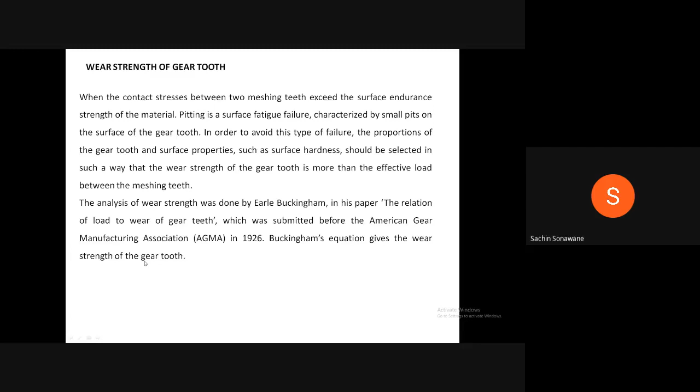Buckingham's equation is based on Hertz's theory of contact stresses. In case of Hertz's theory of contact stresses, when two cylinders are pressed together as shown in figure A, the contact stress is given by sigma c equals 2p divided by pi bl, equation A, and b equals 2p into bracket 1 minus mu square into bracket 1 upon E1 plus 1 upon E2, divided by pi L into bracket 1 upon D1 plus 1 upon D2, bracket raised to 1 by 2, equation B.

What has Buckingham considered? Buckingham has considered two gears as two cylinders of diameter D1 and D2, and when the two gears are in contact with each other, the force P is acting on both cylinders so that these two gears or two cylinders will remain in contact with each other.

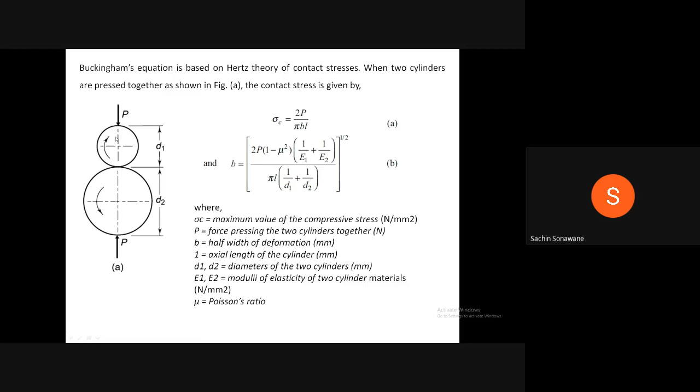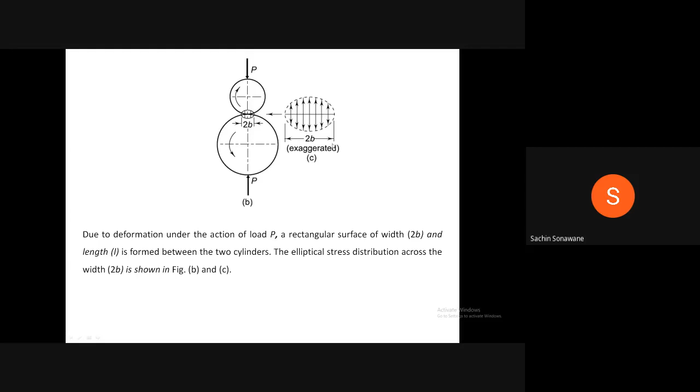When the two forces P and P are acting on the cylinders at the contact point, deformation will be there, and that deformation will be of rectangular shape, and there exist stresses also, and that stress distribution is nothing but of elliptical nature, and width of the rectangular surface is 2b and its length is L.

Now substituting equation B in equation A and squaring both sides, we get sigma c square equals 1 divided by pi into bracket 1 minus mu square into P divided by L into 1 upon R1 dash plus 1 upon R2 dash, divided by 1 upon E1 plus 1 upon E2, where R1 dash and R2 dash are radii of the two cylinders.

Substituting mu equals 0.3, we get sigma c square equals 0.35 P divided by L into bracket 1 upon R1 dash plus 1 upon R2 dash, divided by 1 upon E1 plus 1 upon E2, equation D.

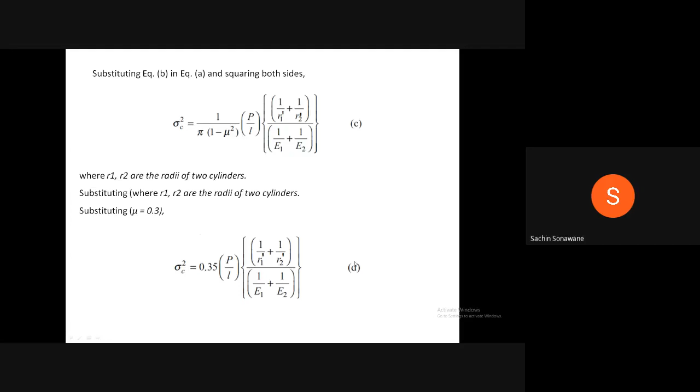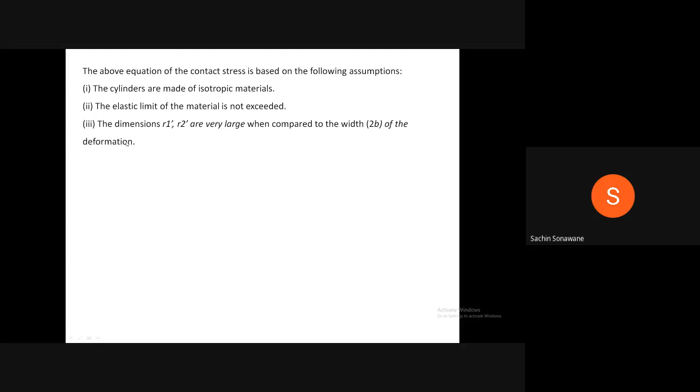The above equation of the contact stress is based on the following assumptions. First, the cylinders are made of isotropic materials. Second, the elastic limit of the material is not exceeded. Third, the dimensions R1 dash and R2 dash are very large when compared to the width 2b of the deformation. These are nothing but the radii R1 dash and R2 dash.

The figure shows the contact between two meshing teeth at the pitch point. The radii R1 dash and R2 dash in equation D are to be replaced by the radius of curvature at the pitch point.

We have considered this right angle triangle, and then we have evaluated R1 dash and R2 dash considering angle sine alpha. Sine alpha equals R2 dash divided by dg by 2. Therefore, R2 dash equals dg sine alpha divided by 2. Similarly, in case of pinion, sine alpha equals R1 dash divided by dp by 2. Therefore, R1 dash equals dp sine alpha divided by 2. These are the two equations we are getting.

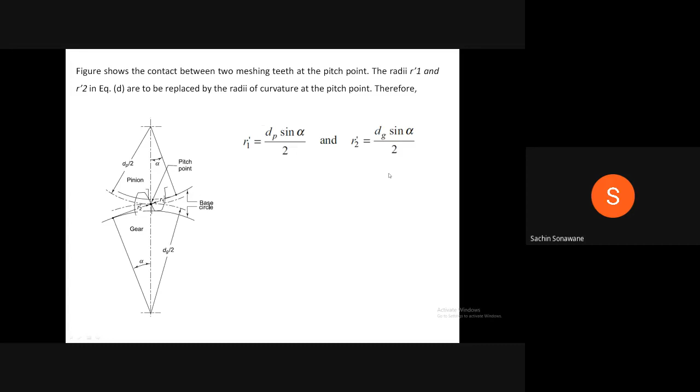Now, why have we taken radius of curvature at the pitch point? There are two reasons. First, wear on the gear tooth generally occurs at or near the pitch line. When only one pair of teeth carries the entire load, the contact occurs at the pitch point.

When the contact takes place at the top or at the bottom of the tooth profile, usually two pairs of meshing teeth share the load, and the dynamic load is imposed on the gear tooth near the pitch line area. Therefore, it is more reasonable to select the radii of curvature at the pitch point.

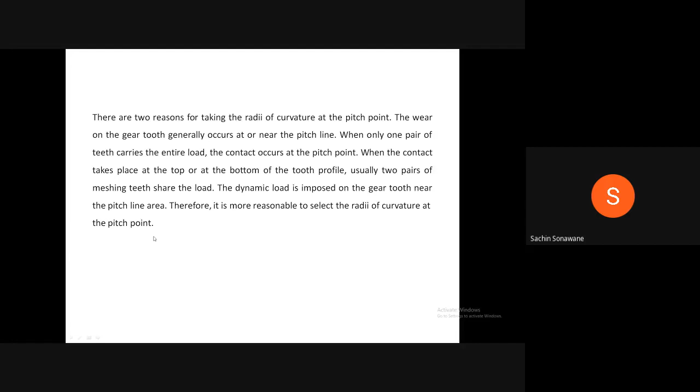Therefore, by adding R1 dash and R2 dash, we get 1 upon R1 dash plus 1 upon R2 dash is equal to 2 divided by sine alpha into bracket 1 upon dp plus 1 upon dg, equation E.

Now we know that ratio factor Q is equal to 2zg divided by zg plus zp. Therefore, substituting dp is equal to mzp and dg is equal to mzg, where dp and dg are the pitch circle diameters of the pinion and gear.

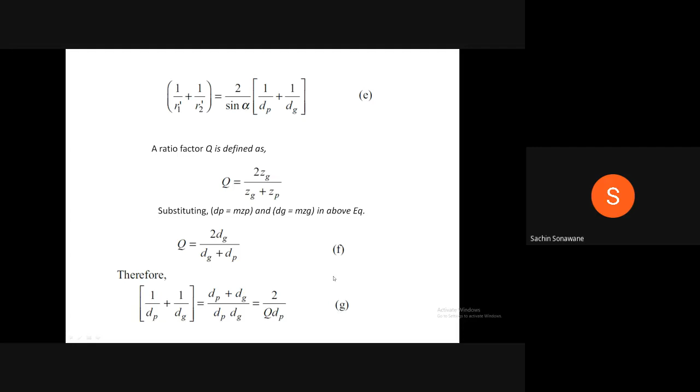Therefore, q is equal to 2dg divided by dg plus dp, equation F. We get 1 upon dp plus 1 upon dg is equal to dp plus dg divided by dp into dg, which is equal to 2 divided by q into dp, equation G. Therefore, from equation E and G, 1 upon R1 dash plus 1 upon R2 dash is equal to 4 divided by q dp sin alpha, equation H.

The force acting along the pitch line is Pn. Therefore, P is equal to Pn, which is equal to Pt upon cos alpha, equation J. The axial length of the gears is the face width B, therefore L is equal to B.

Therefore, substituting equations H, J and K in equation D, we get sigma c square is equal to 1.4 pt divided by bQ dp dash into sin alpha cos alpha into bracket 1 upon e1 plus 1 upon e2, equation L.

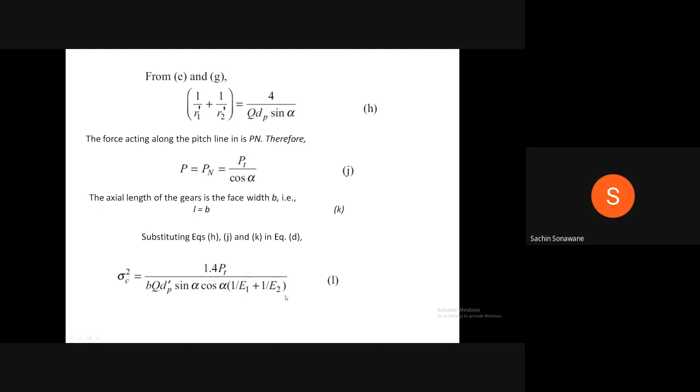A load stress factor K is defined as K is equal to sigma c square sin alpha cos alpha into bracket 1 upon e1 plus 1 upon e2 divided by 1.4. Substituting this in equation L, we get Pt is equal to bQ dp k, equation M.

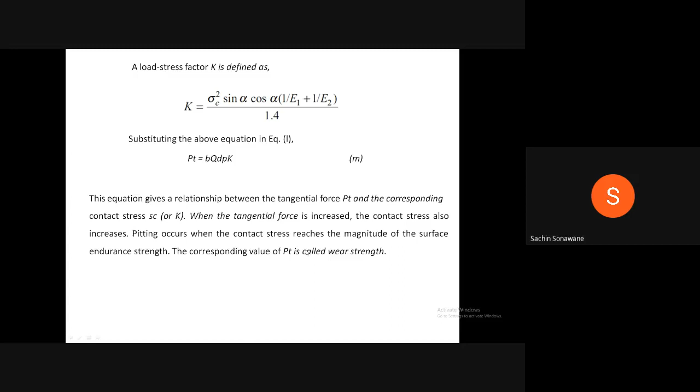This equation gives a relationship between the tangential force Pt and the corresponding contact stress Sc or K. When the tangential force is increased, the contact stress also increases. Pitting occurs when the contact stress reaches the magnitude of the surface endurance strength. The corresponding value of Pt is called wear strength, which is the maximum value of the tangential force the tooth can transmit without pitting failure.

Replacing PT by SW, the equation is written as SW is equal to BQ dp K, where SW is the wear strength of the gear tooth in Newton, and SC is the surface endurance strength of the material in Newton per mm square. This equation is known as Buckingham's equation for wear.

Yesterday we saw up to this point. Now, if internal gears are meshing internally, the ratio factor Q for internal gears is defined as Q is equal to 2ZG divided by ZG minus ZP. Up to this we saw yesterday.

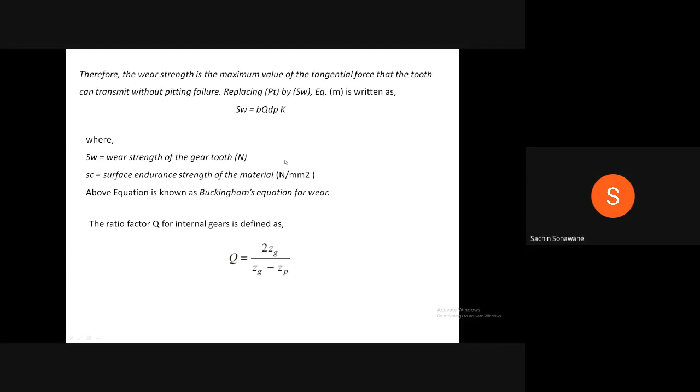Now next, we have to calculate the value of K also. The expression for the load stress factor K can be simplified when both gears are made of steel with a 20-degree pressure angle. In this case, E1 is equal to E2, which is equal to 20.6 into 10 raised to 4 Newton per mm square, and alpha is equal to 20 degrees.

According to G. Niemann, sigma C is equal to 0.27 into 9.81 Bhn in Newton per mm square, where Bhn is the Brinell hardness number. Therefore, K is equal to, using the formula, sigma C square sin alpha cos alpha into bracket 1 upon E1 plus 1 upon E2 divided by 1.4.

Write this down, I will wait for 5 minutes because we have to calculate the value of K, which is K is equal to 0.16 Bhn divided by 100 bracket square. Write down this slide.

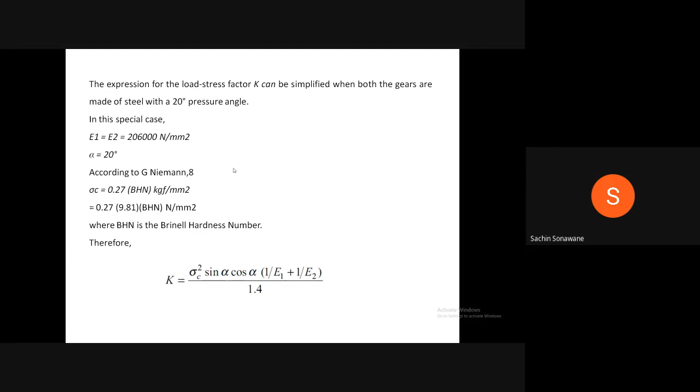K is equal to sigma c square sin alpha cos alpha into bracket 1 upon e1 plus 1 upon e2 divided by 1.4. Now substituting all the values, we get 0.27 into 9.81 bracket square into bhn square into sin 20 cos 20 into 2, divided by 20.6 into 10 raised to 4, divided by 1.4.

Therefore, we get K is equal to 0.156 BHN divided by 100 bracket square. This 0.156 they have converted into 0.16. Therefore, K is equal to 0.16 into BHN divided by 100 bracket square.

The above equation is applicable only when both gears are made of steel with a 20-degree pressure angle. Therefore, we use the value K is equal to 0.16 into BHN divided by 100 bracket square when both gears are made of steel material and their pressure angle is 20 degrees. Write this down and then we will see the problem.

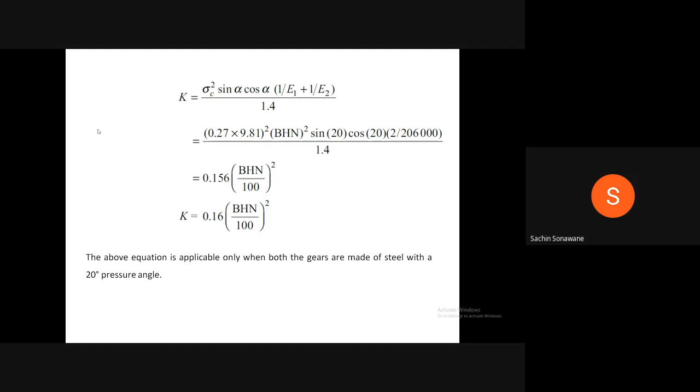Therefore, there are different values of modulus of elasticity and Poisson's ratio for different materials.

Table 8 gives the material properties for the calculation of K. In order to avoid failure of the gear tooth due to pitting, the wear strength should be more than the effective force between the meshing teeth.

Therefore, table 8 gives values of modulus of elasticity and Poisson's ratio for gear materials. First column is material, second column is modulus of elasticity in Newton per mm square, and third is Poisson's ratio.

For steel, modulus of elasticity is 2.06 into 10 raised to 5 Newton per mm square, Poisson's ratio is 0.3. For cast steel, modulus of elasticity is 2.02 into 10 raised to 5. Poisson's ratio 0.3. For all materials, Poisson's ratio is 0.3, but modulus of elasticity is different.

For spheroidal cast iron, 1.73 into 10 raised to 5. For cast tin bronze, 1.03 into 10 raised to 5. For tin bronze, 1.13 into 10 raised to 5. For grey cast iron, 1.18 into 10 raised to 5.

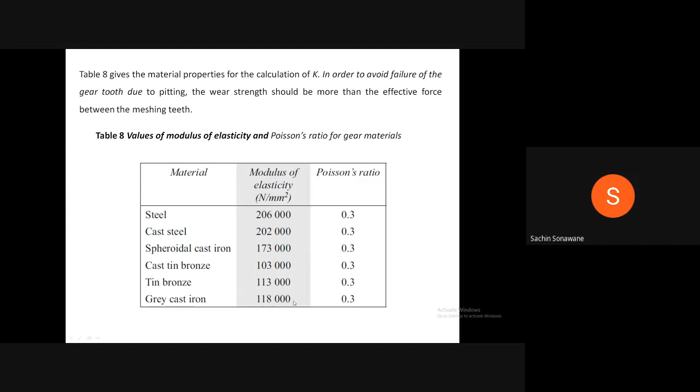Now, please write down these steps on how to calculate module, because there are two types of problems.

In case of gears, the first type is we have to calculate the module, beam strength, wear strength, and power. The second type of problem is we have to calculate the module for the design of the gears, and depending on the module, we calculate the dimensions of the gears.

Again, we have to check for design. Therefore, these are the different steps to calculate module. Write down one by one.

Step number one, calculate torque transmitted MT from the power formula: kilowatt is equal to 2 pi n into MT divided by 60 into 10 raised to 6. Write down this first step.

Second step, calculate tangential load PT in terms of module M from torque transmitted. Torque transmitted MT is equal to PT into dP divided by 2, where dP is the pitch circle diameter of pinion in mm, which is equal to m into Zp, and Zp is the number of teeth on pinion. Rearranging the above formula, Pt is equal to 2MT divided by dP.

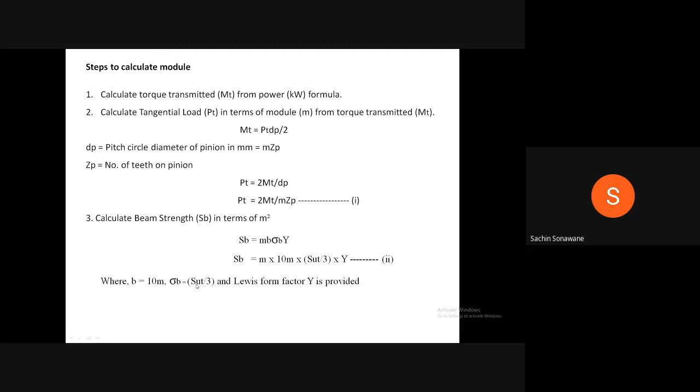The third step is to calculate beam strength SB in terms of m square, that is module square. We know the equation SB is equal to mb sigma b into y, where SB equals m into 10m into SUT divided by 3 into y — equation 2, where b is equal to 10 times module, sigma b is equal to SUT divided by 3, and y is Lewis's form factor based on the number of teeth provided. SUT value is also provided in the problem.

Step 4: if Brinell hardness, that is BHN, is given, then we have to calculate wear strength SW in terms of m square. Again, wear strength SW is equal to BQ dp K — equation 3, where B is equal to 10 times module, dp is equal to mZp, Q is equal to 2Zg divided by Zg plus Zp, and K is equal to 0.16 into BHN divided by 100, whole square.

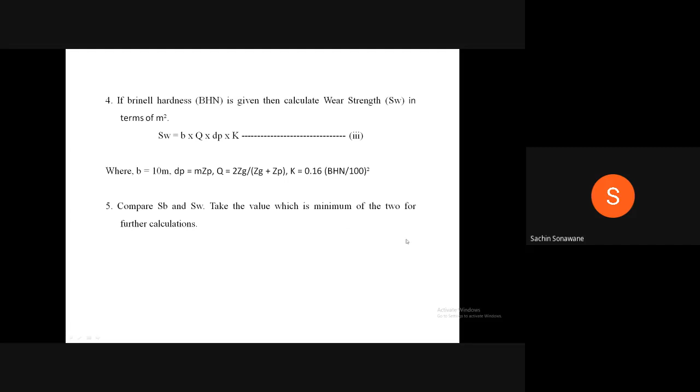Now we have to compare the values of beam strength and wear strength, that is SB and SW, obtained from equations 2 and 3, and take the minimum value of SW or SB for further calculations. Step number 6: calculate effective load P effective, which is equal to CS PT upon CV, where CS is the service factor provided in the problem, and CV is the velocity factor.

There are three different values of CV depending upon the manufacturing process of gears. CV is equal to 3 divided by 3 plus V, CV is equal to 6 divided by 6 plus V, and CV is equal to 5.6 divided by 5.6 plus root V, where V is the pitch line velocity in meters per second. In the initial stages we have to assume V is equal to 5 meters per second. This is the sixth step.

Now the seventh step: whatever P effective we have obtained from equation 4 in terms of M, we have to equate it to the minimum value of SB or SW. When we equate it, we get an equation in terms of M cube, that is M raised to 3, and at last we get the value of module M. Therefore, these are the steps.